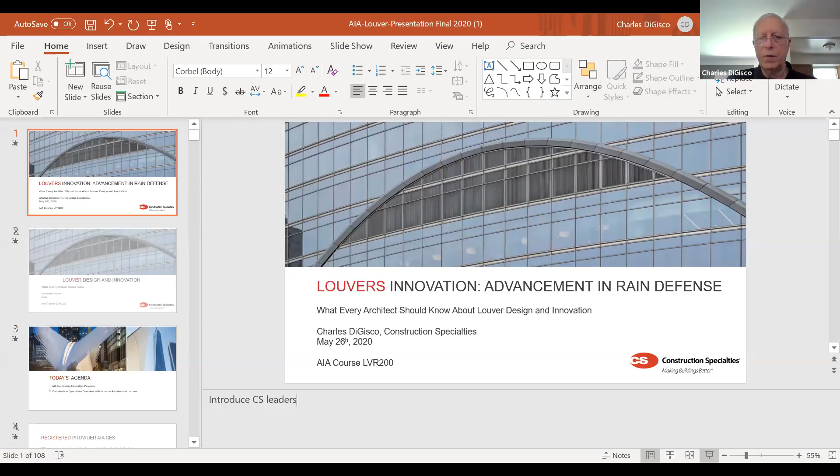Good afternoon, everyone. Everybody safe and sound? You have to pull your screen down, right, Lauren? Or Aaron? You should be able to share immediately from your screen, but let me know if you run into an issue. No issue. Great. So let's reduce that. Okay, everybody can see the screen, I hope.

So good afternoon. My name's Charles. I've been with Construction Specialties exactly 20 months. Today, you are going to be presented an AIA continuing education course, and the title is LVR 200, Louver Innovations, Advancement in Rain Defense.

This is an AIA continuing education program, Construction Specialties overview with focus on architectural louvers. And you can see a couple of images on this screen here. This is the Oculus at the Transit Hub in New York City on the grounds of the old World Trade Centers. And this is the Freedom Tower on the right that you see in the image.

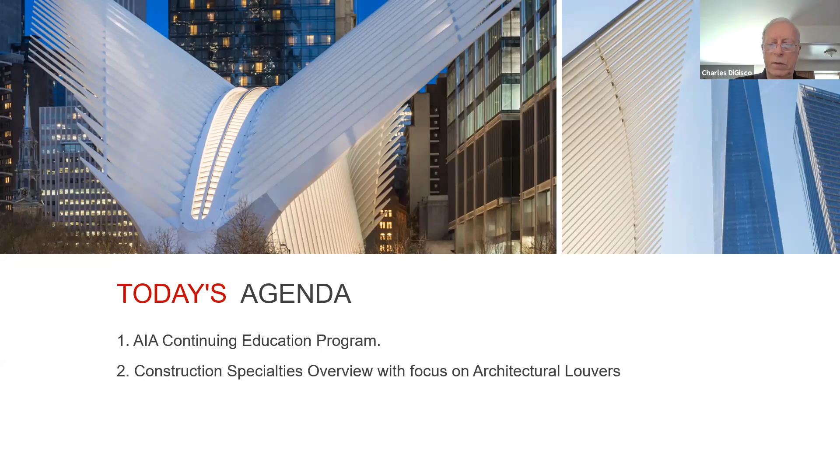Construction Specialties is a registered provider with the American Institute of Architects continuing education system. You will earn credit on completion of this program. Our provider number is J144-03. This program is registered with AIA CES for continuing professional education.

As such, it does not include any content that may be deemed or construed to be an approval or endorsement by AIA of any material of construction or other method or manner of handling, using, distributing, dealing in any material or product. Questions related to specific materials, methods, services will be addressed at the conclusion of this presentation.

So, what will we learn today? We're going to have a good understanding of architectural louver types, their availability, where to use them, and the conditions where louvers are specified.

You will hear AMCA. That acronym stands for Air Movement Control Association. And BSRIA, B-S-R-I-A, is an acronym for Building Services Research and Information Association. Mostly today, we're going to be dealing with AMCA certifications.

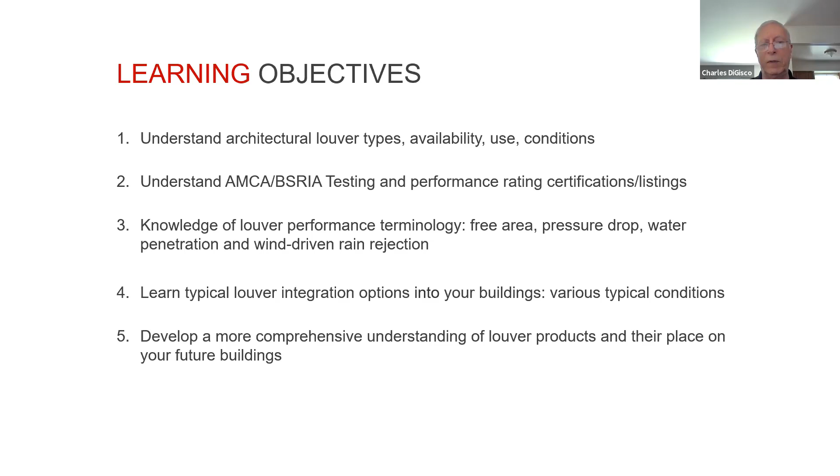We'll learn typical louver integration options into your building, various typical conditions, and along the way here today, we're going to develop a more comprehensive understanding of louver products and their place on buildings. So, let's get started.

Louver aesthetics is a very major part of the design of a building envelope. This is driven 100% by architects. The architects decide what it's going to look like, where it's going to go, and how it's going to be installed, and what color it's going to be.

If you are outsourcing your MEP, FP to a mechanical consulting engineer, you will then be tasked with air intake criteria. Air intake criteria is the principal function of a louver system, right? So air from the outside passes through the louver system, stops the water, and then just the air passes through the other side. So aesthetic, 100% architect driven.

Air performance, this is in collaboration with the mechanical engineer. And water performance, keeping out wind-driven rain. We're going to talk about that very shortly, why that is so important to the mechanical engineer.

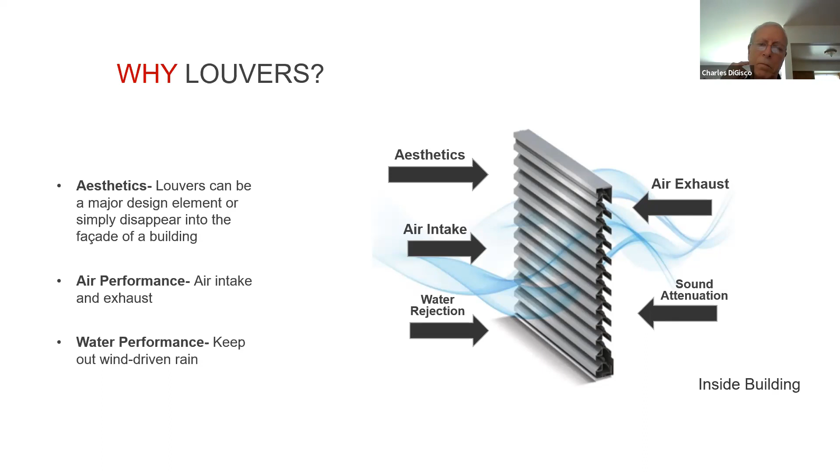So a little bit of history. In this image on the right, you see that the blades are quite wide. The face of the blade has got depth to it. The spacing, or the free area, between the bottom of one blade and the top of the blade beneath it allows a lot of air to pass through. This is free area. So this is an older design, the J style, the Z style.

These are very, very good for airflow, very good free area, but they offer little to no rain defense. So any rainwater that hits the face of that blade, the widest part that we're looking at, for the most part gravity will pull it down and away from entering the building. But only the rain that hits the face of the blade will drain off it.

Back in the late 80s, you started to see different extrusions that now had a drain in the front. So the conventional thinking is, well, if I have rain hitting the face of a louver blade, and it gets collected and drained off by the design, then I have excellent water mitigation, and I've pretty much stopped the entrainment of water in the building. Not necessarily 100% accurate, because the only water that will drain off the face of the louver is all that the drain will catch.

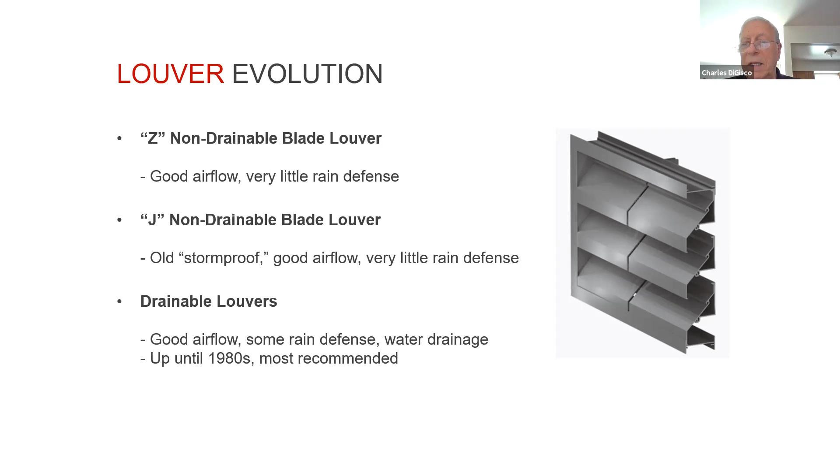So I'm going to go back for a second. This is the older style louver design, wide facing blade, a lot of space between the bottom of the top blade and the top of the blade beneath it. And then we have this. So you can see by the very nature of this horizontal orientation of these louvers, we have reduced the amount of space that water can pass through.

So I'm going to stop here. We're going to talk about why managing water with a louver system is so important.

Back in the day, they used to design a plenum. So quite frankly, it didn't really matter how much water entered the interior of the building, it fell to the plenum, to the space, and drained off. But as buildings became much more efficient and air handlers much more efficient, the space that a plenum took up was now used for mechanical systems. So now we needed to stop the water from entering the mechanical system.

The first space in a mechanical system that water comes in contact with is the filter cartridge, or the filter cassette, or just the filter. So this is the first point where water being introduced to a filter can create pressure drop, because as the filter gets wet, any airborne dust now turns to mud on that filter and makes the air handler work harder to pull the same amount of air through it. This is why mechanical engineers do not want water entering their mechanical system.

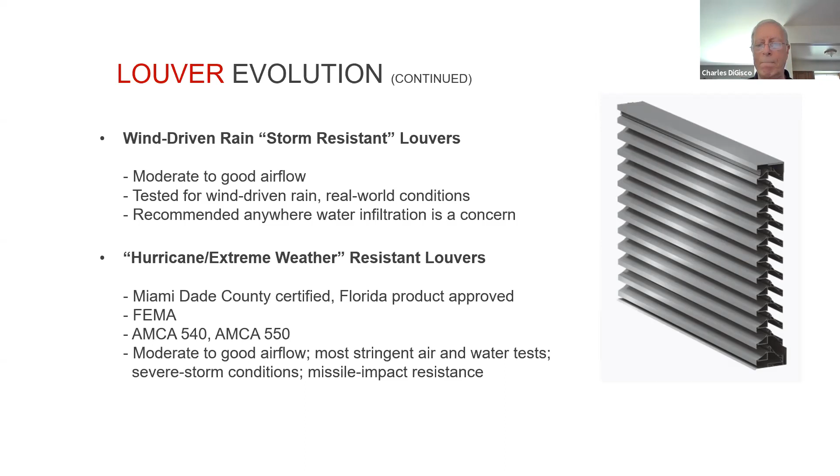Okay, so we have some choices, right? When designing a louver, we have to consider rain defense. We just saw a louver system with the blades very close together and that little bit of a hook. You're going to see an image shortly, which we'll talk about. Free area, which is the amount of air that the air handler is requiring, is space between the blades through which air can pass. Pressure drop: in the very design of a louver system, by the nature of the blades being so close together, you will have less free area. And if you have less free area, you will have a drop in pressure. We're going to talk about this a little bit more in a moment or two.

And then there's the design of the louver itself. Okay, so if I increase the size of a blade, let's say from 5 inches to 7 inch, the depth of that louver increases the same. So if I have a 5-inch blade, I have a 5-inch deep frame. If I have a 7-inch blade, I have a 7-inch deep frame. And a 9-inch blade, obviously, a 9-inch depth frame.

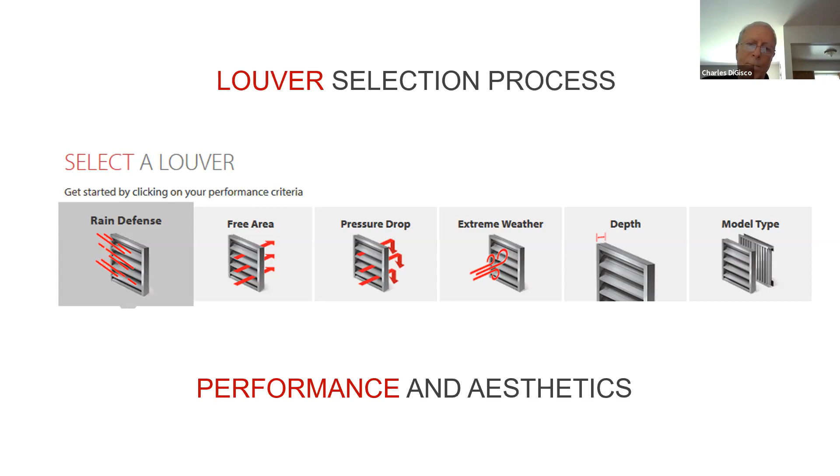And then off to the right, you see a couple of model types. Now, we're bordering on a discussion of aesthetics here, 100% architect driven, and we're going to talk about this in another couple of slides as well. So you have two choices: the first choice is you can have a horizontal orientation, or directly behind that, you can see a vertical orientation. So those are a couple of choices that you can make. I don't want to give away too many bits of information just yet.

So we talked about AMCA. AMCA is an acronym for Air Movement Control Association. They are a third-party independent testing and certification laboratory, I believe in Arlington Heights, Illinois. AMCA is testing and then certifying, but not all louvers by all manufacturers are tested and certified. Some are just tested. So in your specifications, if you call out for an AMCA 540 or an AMCA 550, you are going to get a louver system that has an AMCA label on it saying that it is certified to those specifications, right? AMCA tests air performance, and they test water performance, specifically wind-driven rain.

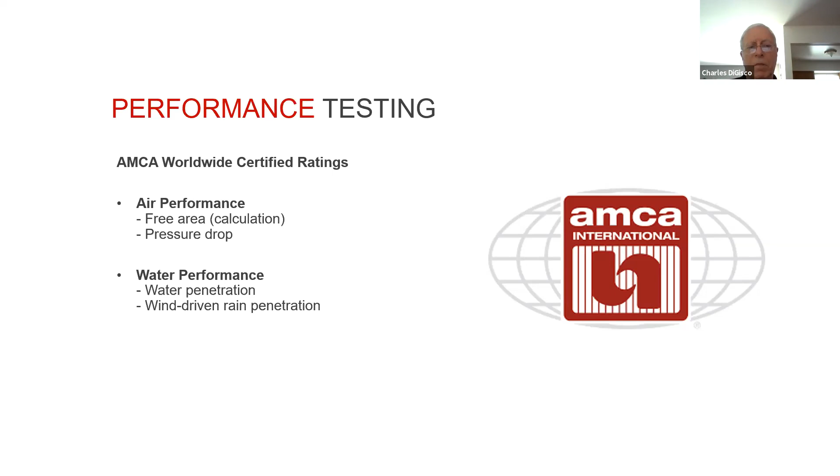So those are the labels. You will see very often water, air, and wind. The label itself is actually blue and yellow, and most always in the specification, when it's designed, when you write the specification, you will say AMCA 540 or AMCA 550, and that label will be on the frame of the louver system that's delivered to the job site.

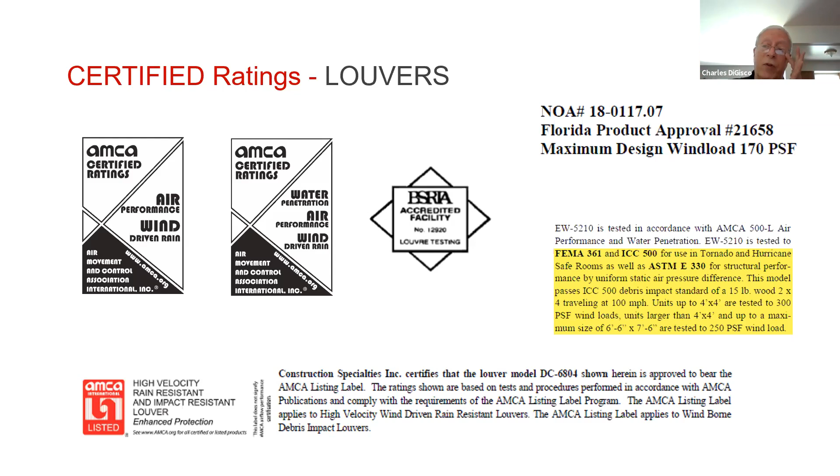So a few minutes ago, we talked about Miami-Dade, and I spoke briefly about NOA, Notice of Acceptance. So these numbers here are tied specifically to Notice of Acceptance and Technical Application Standards. Okay, so product 21658 and Notice of Acceptance means that they accepted it's been tested. These are part and parcel to the specification when you move into Dade County, Miami-Dade County louver systems by any manufacturer.

So let's talk about air performance. You're probably saying to yourself, how many times is he going to tell me about free area? Well, it's important. The free area is the opportunity for outside air to pass through a louver system to be picked up by the cubic feet per minute draw created by an air handling unit.

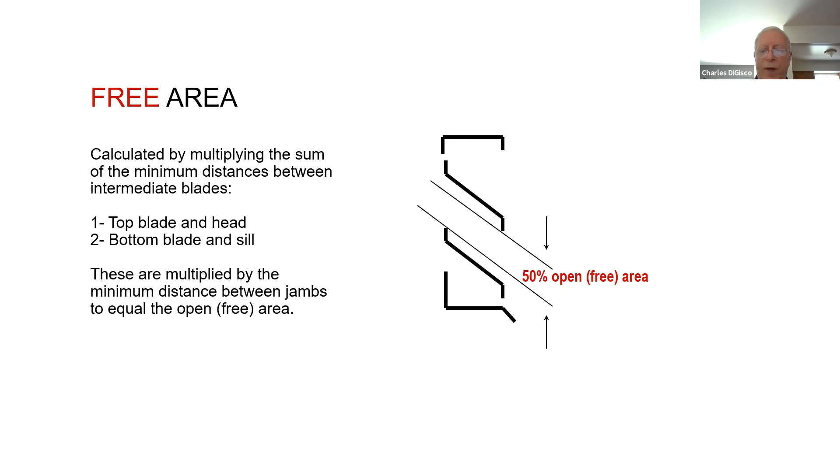Okay, so free area is important. Managing rainwater entrainment is also important. You'll see in a second.

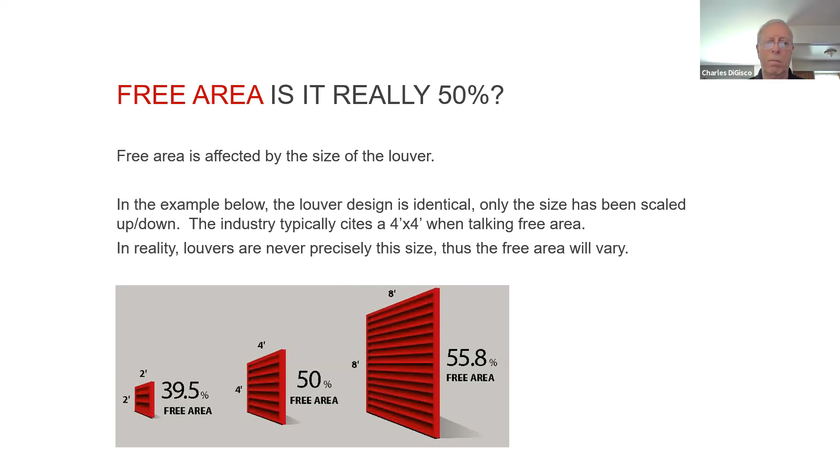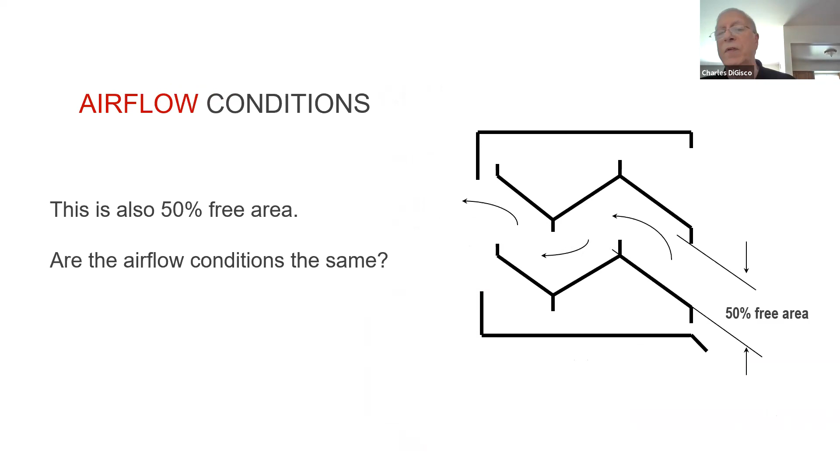So now, this is not a trick question, right? You can see what's happening here. So I have the bottom of the top blade and the top of the blade beneath it as my free area. The air starts out very nicely entering the louver system, but guess what I did here? I created my own resistance. I disrupted the airflow. I created pressure drop.

So I start at 50%, but now I have a louver configured in such a way to mitigate water entrainment that I've now created pressure drop and I have less free area. The correlation between free area and pressure drop are connected forever. The less free area, the higher the pressure drop.

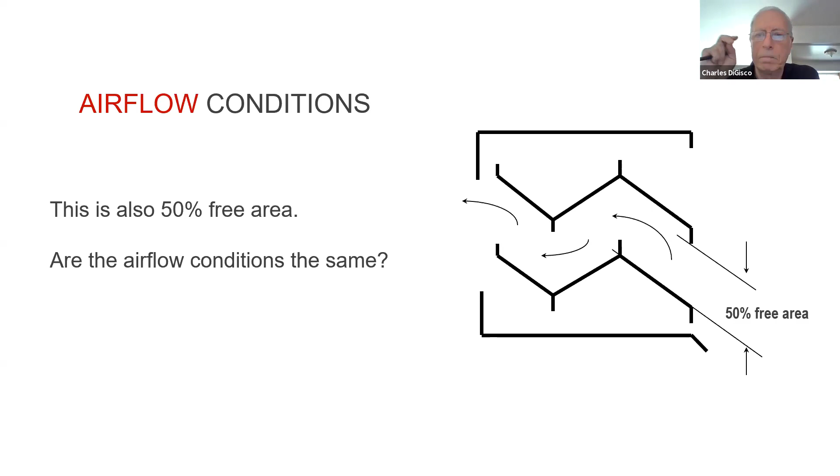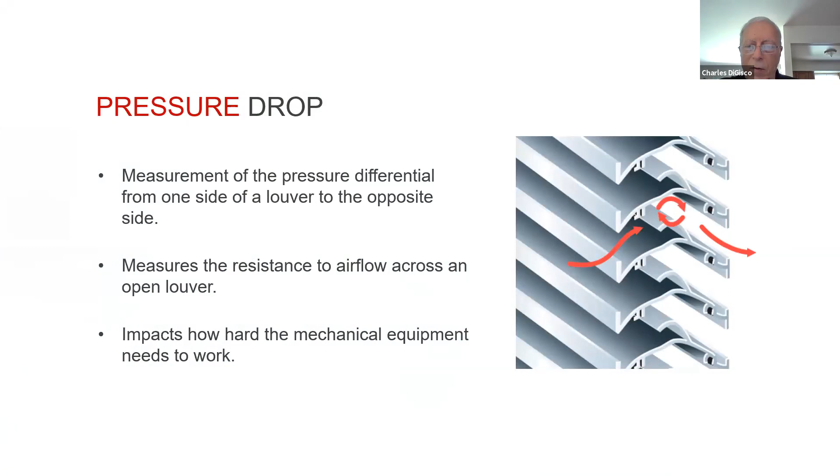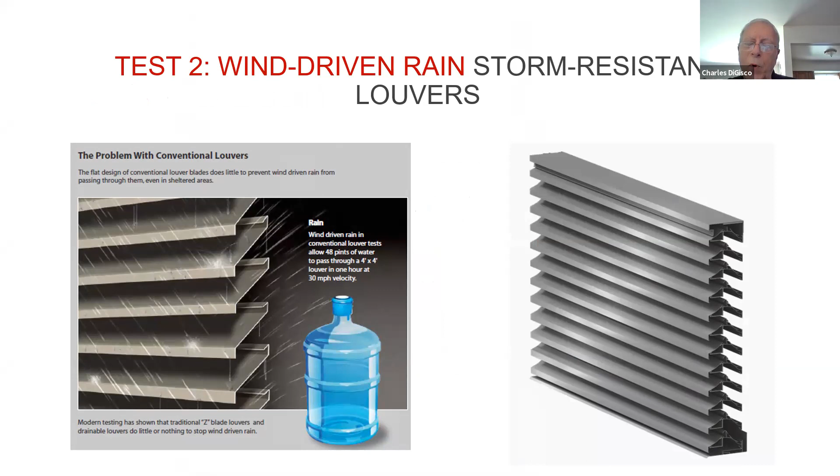Off to the right, you have a storm-resistant louver. Do you want me to go back? I want to show you that picture again. This louver system right here is that one. In a traditional storm-resistant design, your louver blades will be closer together, with that extrusion or hook as part of the extrusion. These louver systems give you the greatest opportunity to stop water entrainment into a building.

So the first test we saw was still air—it was an AMCA 500 test, but there was no wind driving any water against the louver. It was just water falling, nice spring flat rain, and then the axial fan off to the left was creating the draft normal in an air handler.

In this test, we have a 2-speed fan, 29 miles per hour or 50 miles an hour, and at the same time we're driving rain pushed by the wind—either 3 inches per hour at 29 miles per hour or 8 inches per hour at 50 miles per hour. This test is specifically designed to challenge the louver system's ability to manage water entrainment. It is called the 500L99. In your part of the world, you will specify wind-driven rain louvers almost exclusively. Very rarely would you not do that.

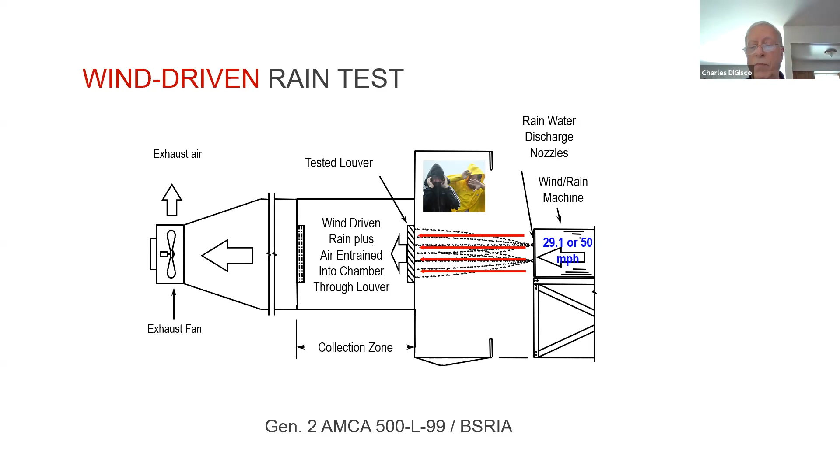So this is what the test chamber looks like. In this larger box, an arrow points to an orange square, and that orange square is the louver. You see this cylinder—you're taking wind and driving rain, simulating 3 inches an hour at 29 mile an hour wind, or 8 inches an hour at 50 mile an hour wind, and driving that water right to the face of the louver. The test is designed to see if the louver will fail and water will enter the interior of the building. This is a very good test.

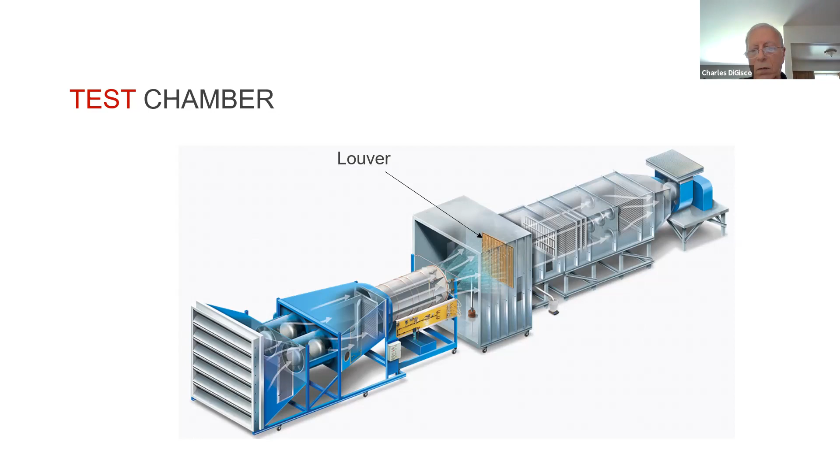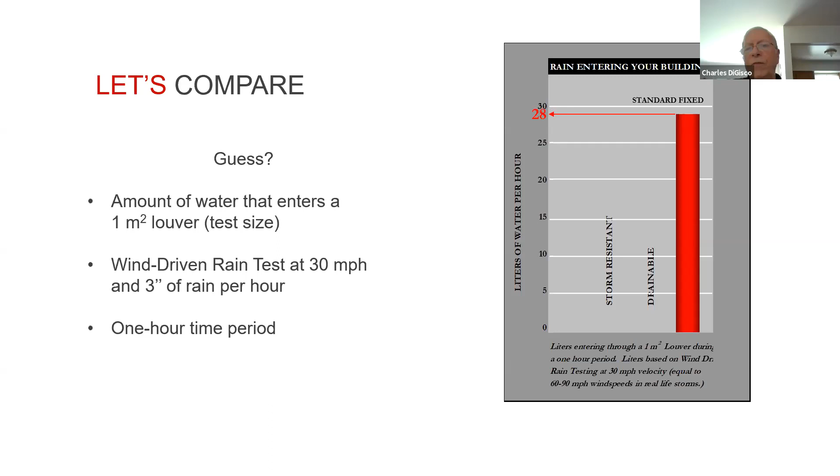So let's play a little bit. We talked about J and Z type blades, then a drainable blade, and then the best of the best, storm resistant blade. The standard blade offers virtually no management of water entrainment whatsoever—28 liters of water per hour is entering the interior side of the building. This is a problem for the air handler, I can tell you.

So you say to me, Charlie, can I design a drainable louver that helps with water entrainment? Well, yeah, you can—watch what happens. Now only 26 liters of water per hour are entering the interior side of the building. This is still a mess. Then you say, okay, I want storm resistance, and you're going to get it. That is the difference between standard flat-faced louver, standard louver, drainable, and storm resistance: 2.5 liters of water per hour. That's it.

This is a very important, but very simple, very important graph.

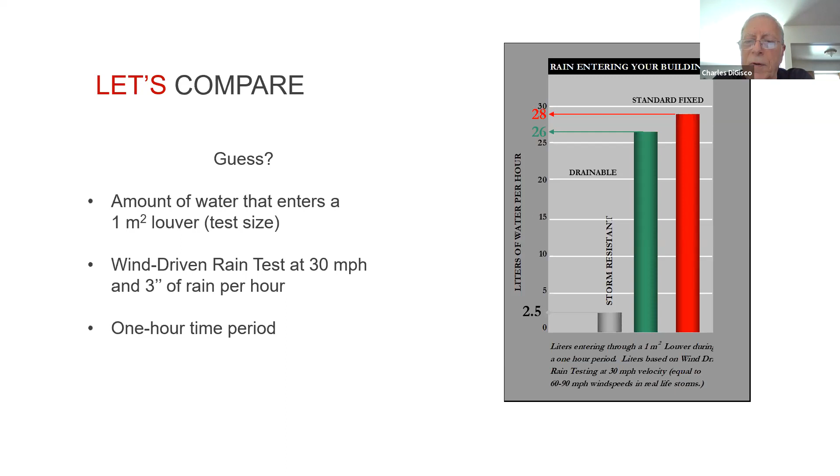Now, I'm sure you'd have lots of questions, but this is the back of a louver, the interior side. If you look all the way down the bottom, you see a straight but somewhat wide piece of aluminum—that is a sill pan. Any rainwater that enters the building without the force of fans, in a typical louver, drains off the back of the blade and gets collected by the sill pan, then comes out the front or the side. You also see these two little angles of aluminum—those are the clip angles. That's what secures the louver frame to the CMU or whatever material we're installing the louver to, most likely CMU. Here we go.

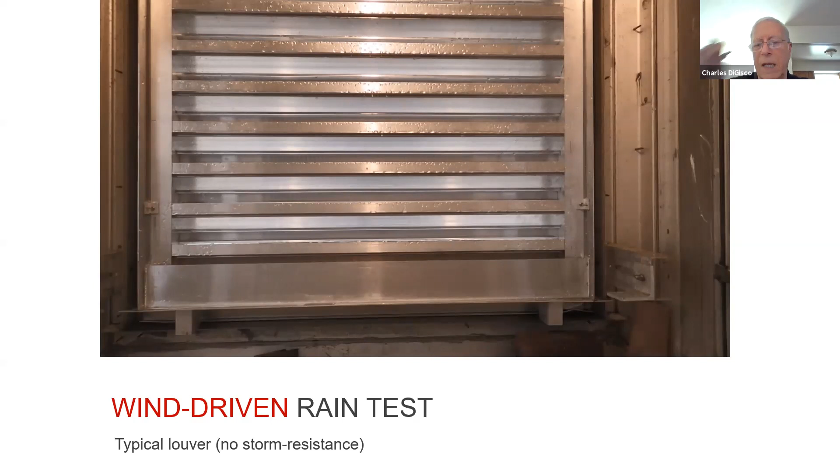This is a simulation, a test. This is not a storm-resistant louver, but it's being tested as if it were supposed to resist storm, wind-driven rain. You can clearly see we have a disaster on our hands by how much water is on the back of the blade. We don't want that. Air handlers hate it. So let's move on.

Here, same size. You can see the sill pan at the bottom, that solid long piece of aluminum. You can clearly see the clip angles, simulating clipping off to CMU, attached to the frame. This is a storm-resistant louver. The louver previously was not.

Hardly anything. This is what we want. So, standard, Z or J, no water management, no mitigation, no entrainment at all. Drainable, a little bit, not enough. Storm resistant, you win.

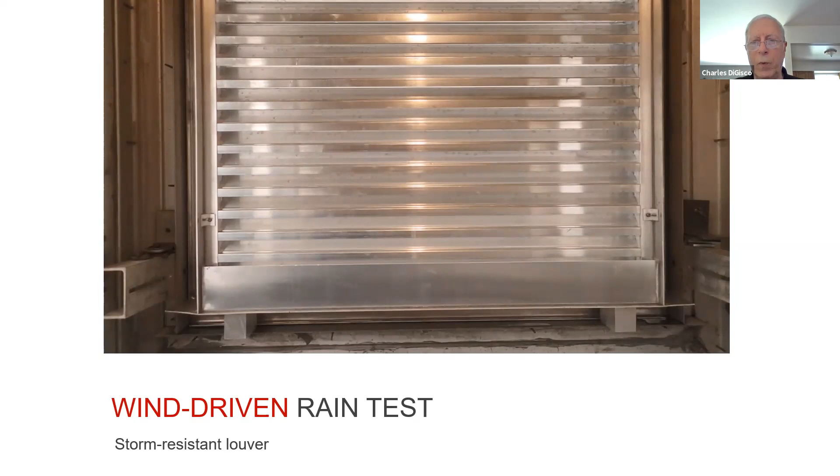There are two orientations. We saw a little image earlier in the presentation. Up top on the left, we have a horizontal orientation, clearly storm-resistant blades, rain driving against the face of the blade, and none reaching the interior side of the building. Down at the bottom, vertical orientation, lots of blade face for rainwater to come in contact with. Gravity works in your favor and the water doesn't get to the inside of the building. These are both storm resistant, one horizontal orientation, one vertical.

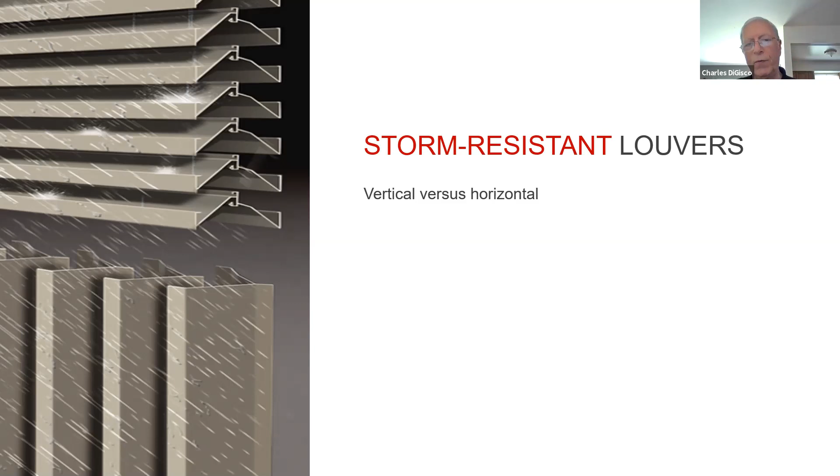This is where we have the most hurricane-prone, high wind situations. We have options. We have AMCA 540, impact, and AMCA 550, 110 mile an hour wind, 170 pounds per square foot wind loads. We have choices.

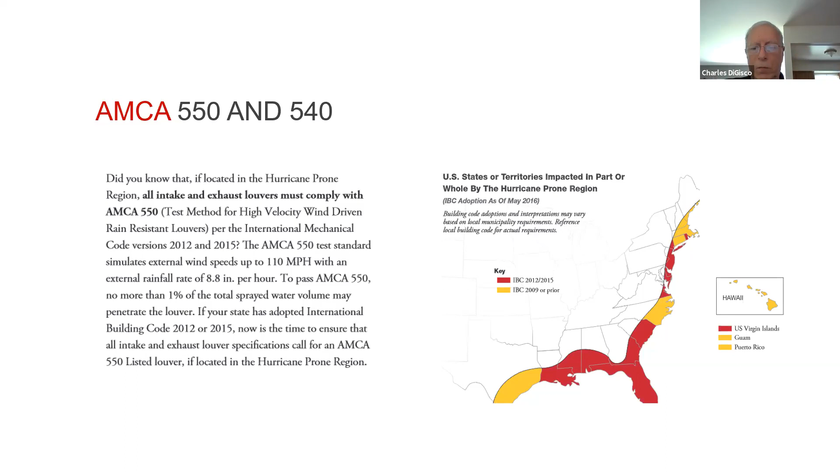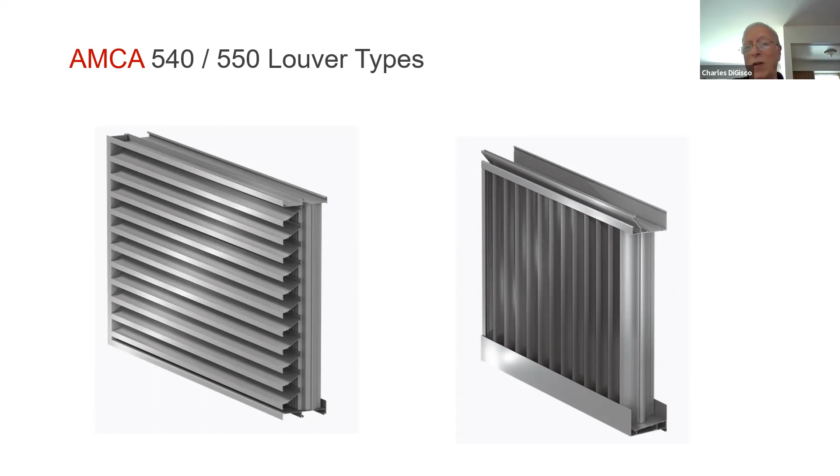So what is FEMA 361? FEMA 361 is the guidelines from the federal government for tornado and hurricane, for any community residential safe rooms. More and more you see safe rooms designed, unfortunately, in schools. So sad to say, but the school still needs to get air. Or the Public Safety Administration building, the firehouse, the police station. All of these locations very often will have FEMA 361 written into the specification.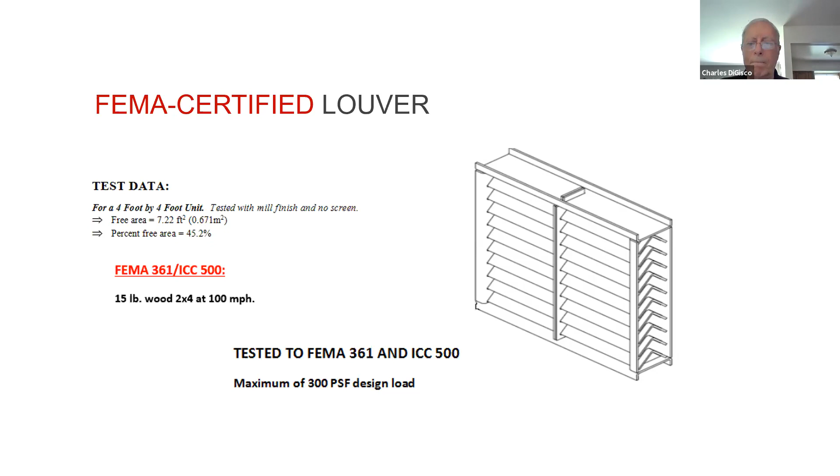This is an acoustic louver system. So the idea here is we are not concerned about rain defense. We are not concerned about airflow. We are concerned about noise decay and how to facilitate it. So the way you facilitate noise decay is you give the noise the opportunity to reach something that will absorb it. This is very evident if you were to go into a brand new room that you just built for yourself.

There is nothing on the wall. There is nothing, no furniture. There is no carpeting, nothing. You can hear your echo because your echo is not decaying in the room. But as soon as you introduce sound attenuating materials into that room, you've reduced the decibel. That is the principle of acoustics.

So if you design acoustic louvers, most often they will be in generator set rooms. If the generator room is attached to a hospital building, it's an L3 type generator room, which means you have to reduce the noise decibels by 13, minimum.

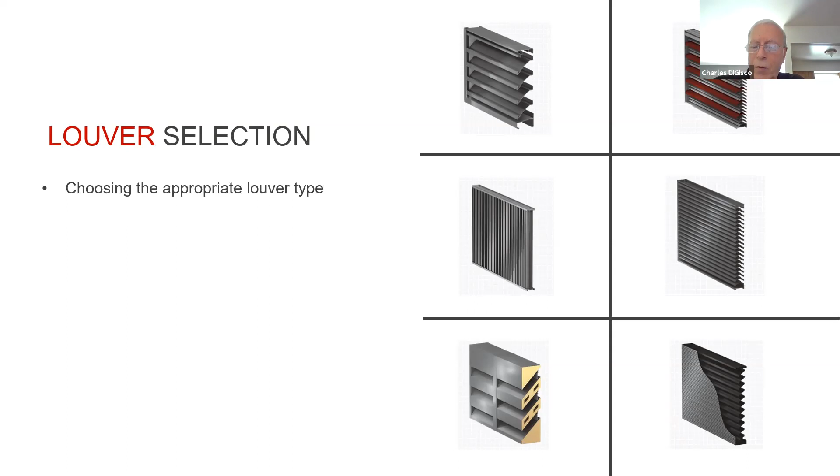Off to the right, you see a very slick looking louver system that has storm resistant blades, but this time the architect decided, I want color. So that design introduces color, spaced out and 100% architect driven. Directly below it, we've seen this before - this is a storm resistant louver. And then below that, you see a louver system, storm resistant, but in this particular illustration, you see a decorative perforated material in front of it. That system is also tested and certified. So you have some things to think about here: acoustics, you can add color, you can add something in front of a louver because maybe you don't like the look of the louver. Total 100% architect driven.

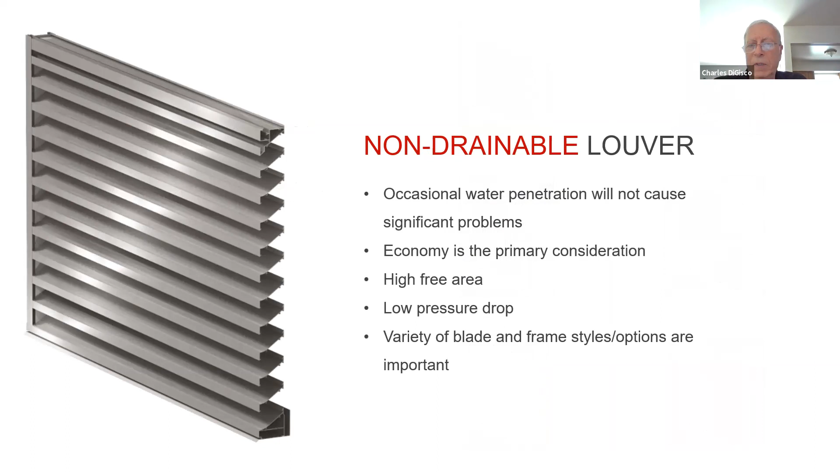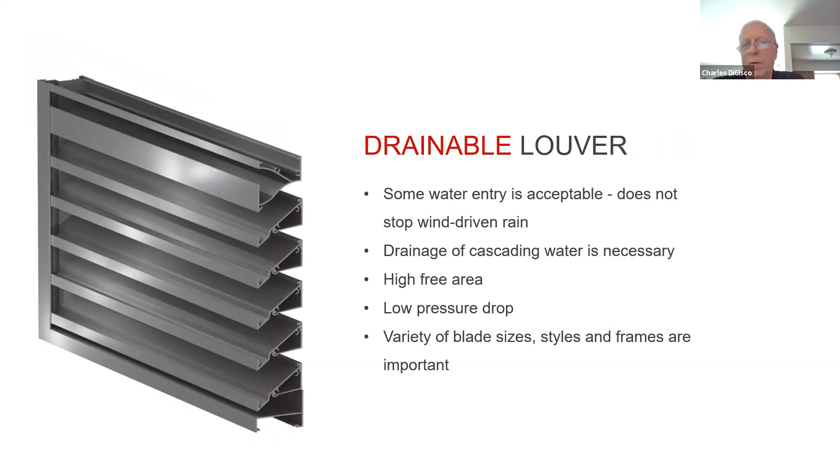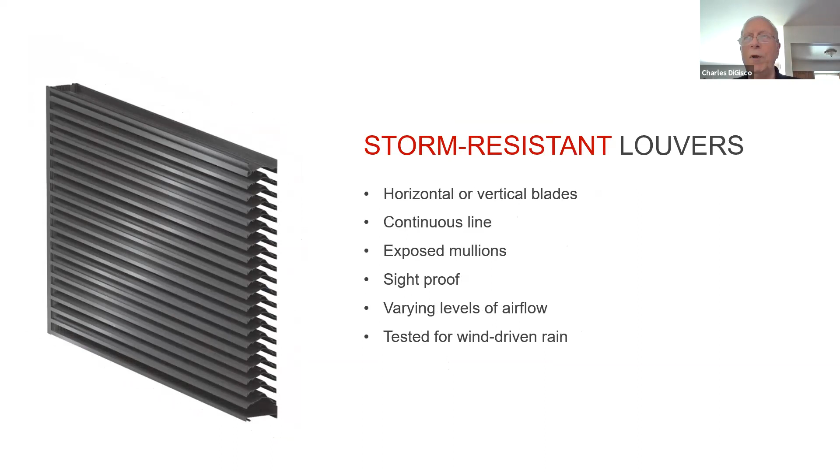So we talked about this. This is the non-drainable design. We know that we have 28 liters per hour entering the building with this type of louver system. Drainable - we know with this system we make only marginal improvement, but we still have 26 liters per hour of water entering the building. And then storm-resistant louvers - here we have managed to provide no opportunity for water to enter the building. 2.5 liters per hour, if I remember the number correctly.

Okay, so there are a few types of louvers. This happens to be a louver system that would be specified perhaps in a hospitality application where PTAC, package terminal air conditioners, are installed, where water protection is not an issue, but high airflow is.

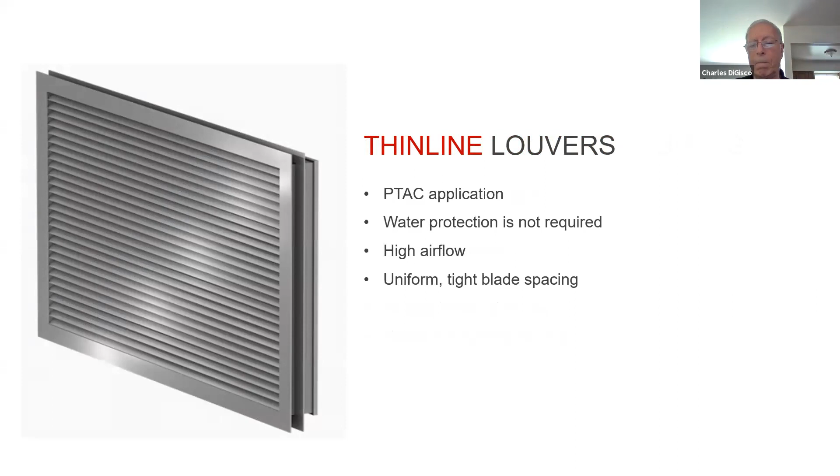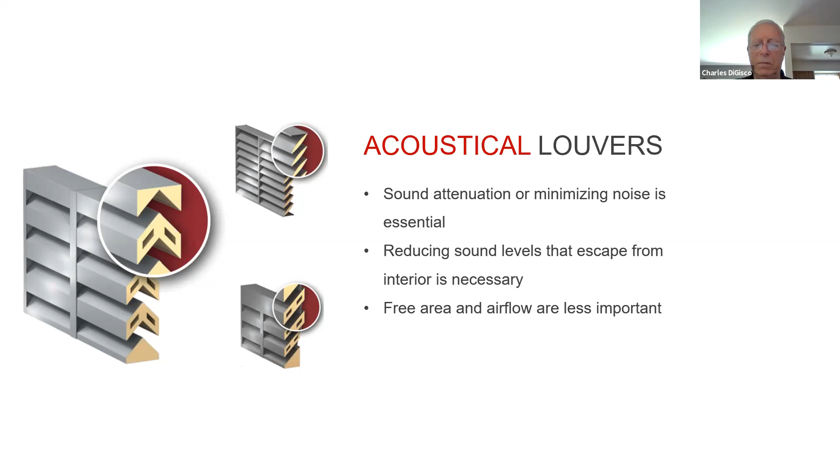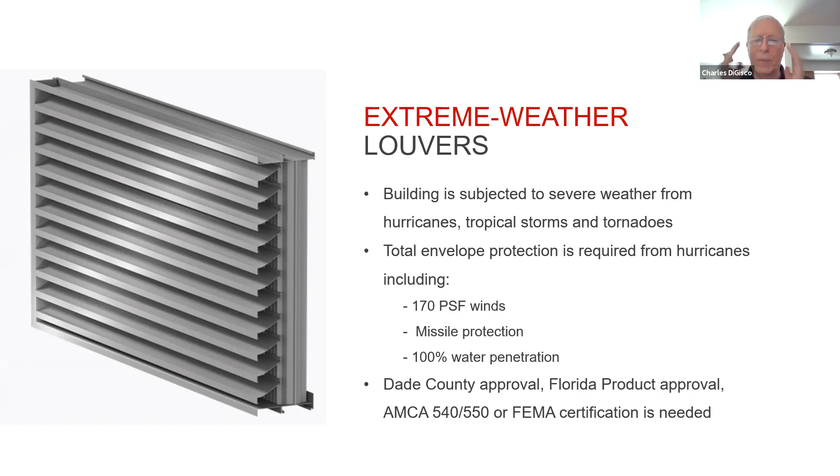Yes, there is such a thing as blast-resistant louvers. These louvers are designed to take a charge of 12 psi or higher at a pulse rate of 7.83 milliseconds - a bomb. Federal buildings, GSA products, all VA hospitals, standard blast-resistant louvers. They look quite nice in person because the blade is rather robust, and it's a very nice looking louver, but it is extremely strong - 12 psi is pretty high. And any federal building, if there is a Federal Reserve building, if there is a VA hospital, blast-resistant louvers are included, always.

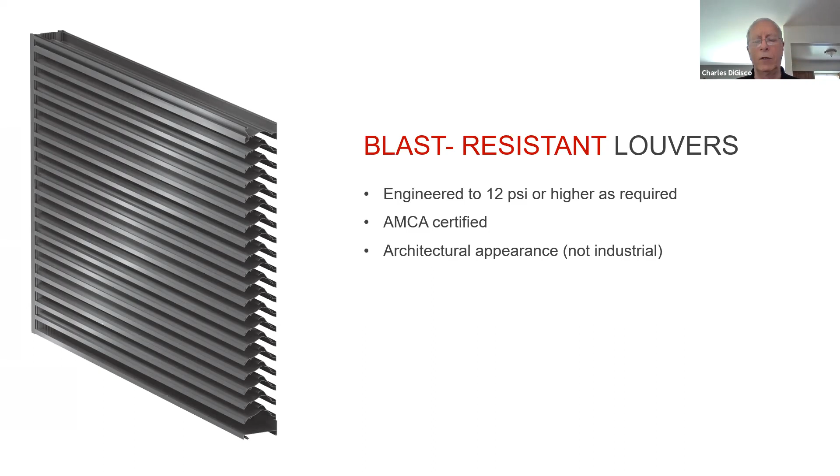Okay, 100% architect driven - you decide how you would like the louver system to look on your building, keeping in mind that you're not particularly crazy about louvers to begin with. But off to the right, in this beige building, this green louver system, the architect liked the look of exposed mullions, tall, thin sections. But directly beneath it, you see a clear span louver application, and here there's a very good chance that that louver system is closer to grade and may actually be, even though it's the same color, a different louver entirely.

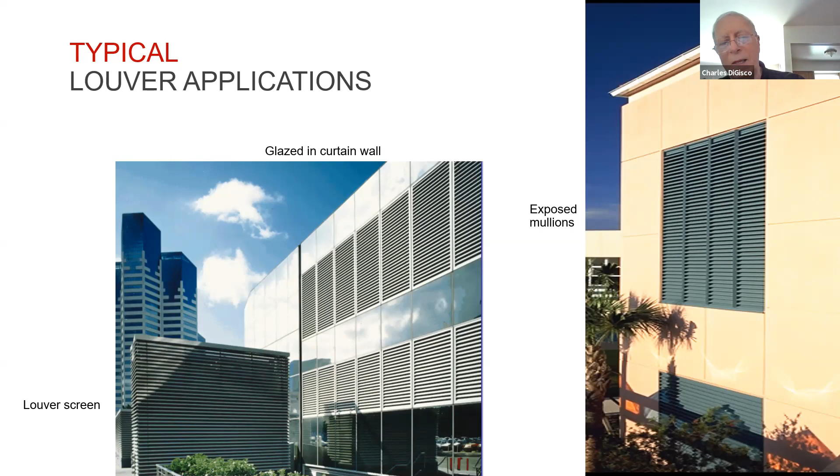And then in the center, if the design allows you to, you could draw louvers right into a curtain wall system - clean, flush. Off to the left, you see a louver system for the exclusive purpose of hiding what's behind it. 100% architect driven - I shouldn't say 100%. There are some ordinances, especially for rooftop mechanical equipment, air-cooled chillers or cooling towers, where there may be an ordinance that says you have to cover it.

Okay, this is what a standard frame looks like. You can see your clip angles clearly in the section cut off to the left. This happens to be a 4-inch Z-blade, not storm resistant.

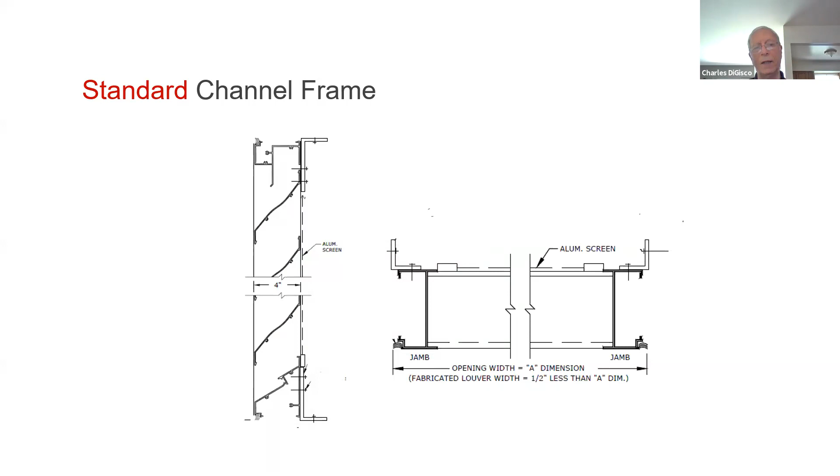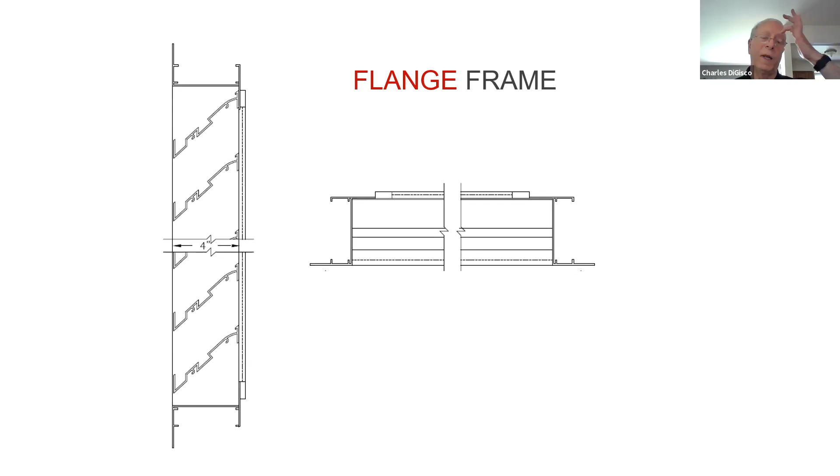Here is a flange frame design. So you're saying, okay, this is an exterior flange, so I get it - I can take this louver from the outside and push it into the opening and it won't fall through the punched opening. There is also an interior flange, which means that the two flange legs that you see on the left side of this image are now on the inside. So that design would be for an installation from the interior side of the building, so the louver doesn't fall through the rough opening.

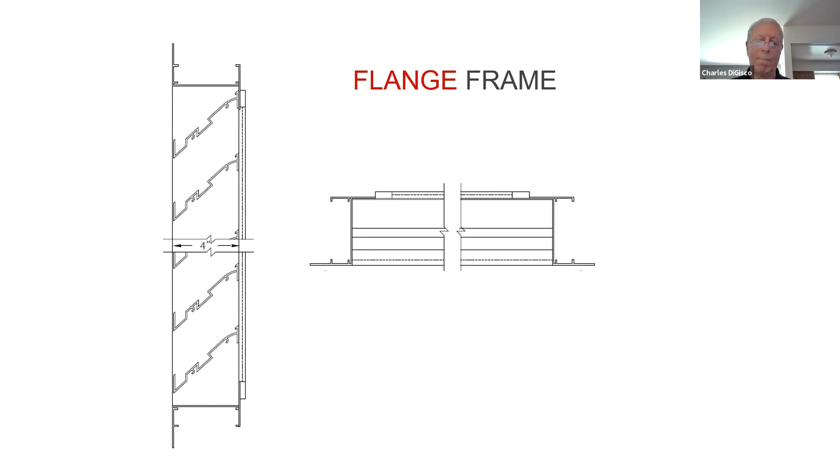Then there is the glazing option. Off to the left in this illustration, take notice of these hash marks in the louver. Those are actually drains in the left and right jamb of a louver so water can drain out. Down at the bottom, that little square you see is your glazing pocket, your glazing adapter.

In the center, you see a louver, a storm-resistant louver, clearly. And on the right, you see the classic J-style drainable.

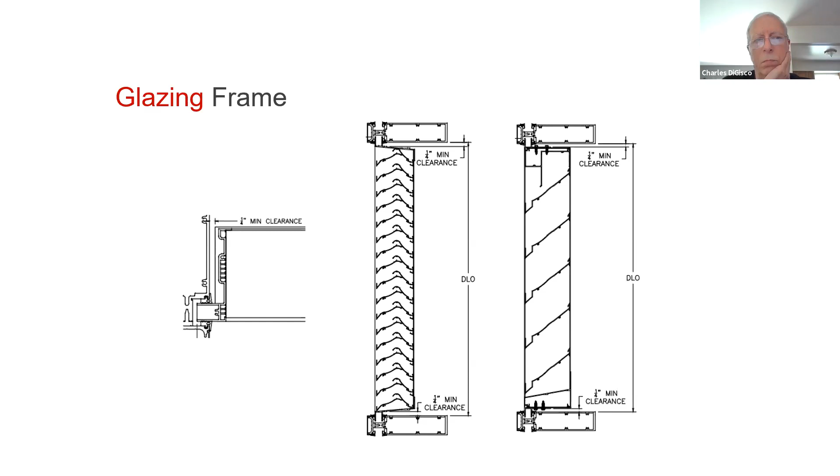100% architect-driven. This is a glazed-in louver system, except the architect wanted to create this specific look as if they were all individual. So all that is beauty cap. Other than aesthetic, no purpose whatsoever.

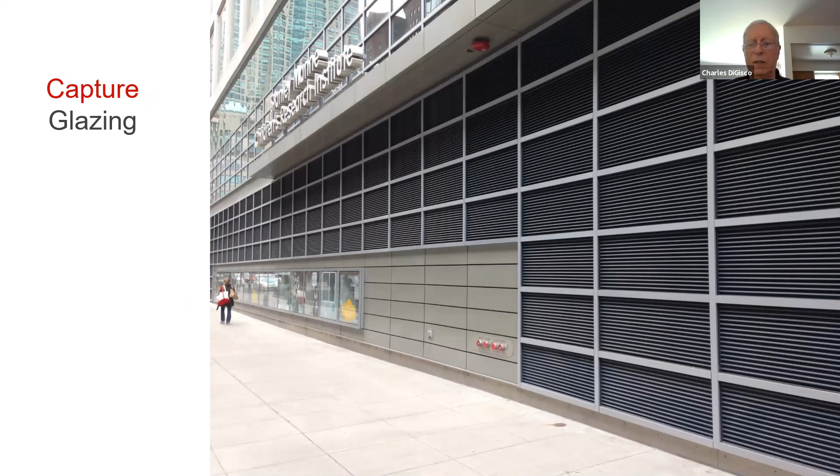I always like this slide. Okay, structural silicone glazing, SSG. Very slick, flush, clean. Clearly you can see the louver installation follows the contour of the glass. Seamed perfectly. In any glazed application, very often, louvers are sent to wherever unitizing is going to be done.

Another example, perfect architect-driven aesthetic. This is not an accident. The architect looked very carefully about how everything lined up perfectly. Those are louvers that you see on the side of this building.

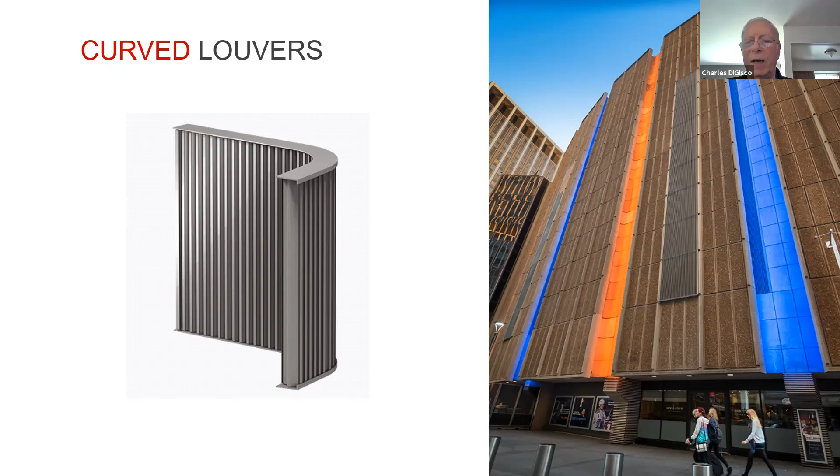That happens to be Madison Square Garden on the right-hand side, New York City. Color, louver type, shape, custom. The architect drew it for the manufacturer and asked, can you build this? The manufacturer said, yes, I can.

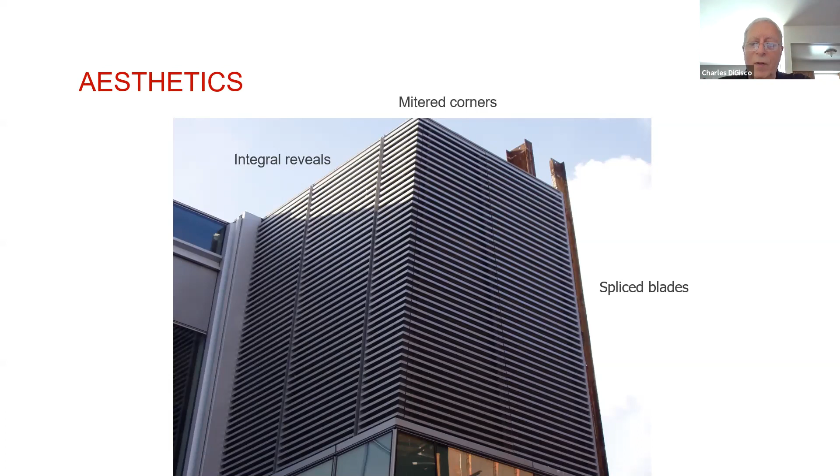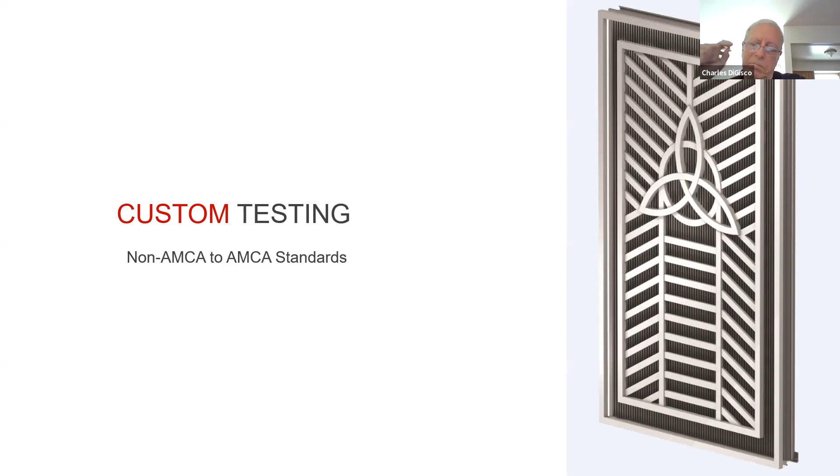So you're probably saying to yourself, Charlie, if I put something in front of the louver, aren't I creating pressure drop? Great question, you're right, you do create pressure drop. But in this case, the manufacturer designed the space behind the louver, between the front of the louver and the back of the perforated sheet, essentially creating free area. So compensation was made by creating space for air to accumulate.

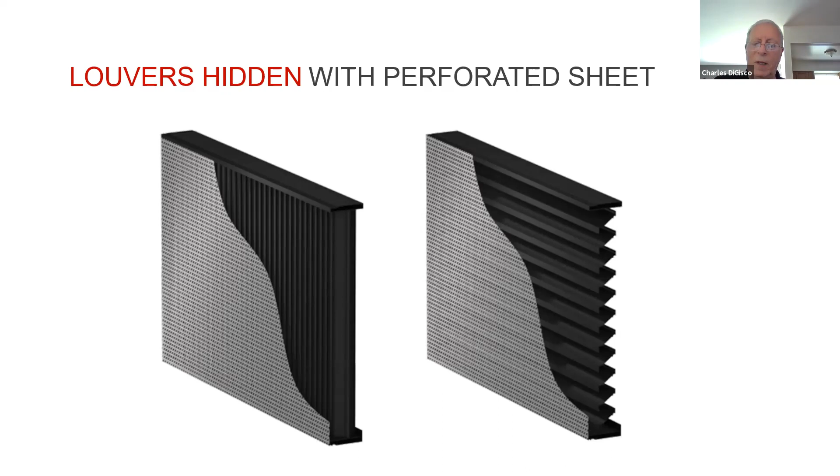Okay, we've seen this, right? Charlie, I don't like the way louvers look. I need to add color.

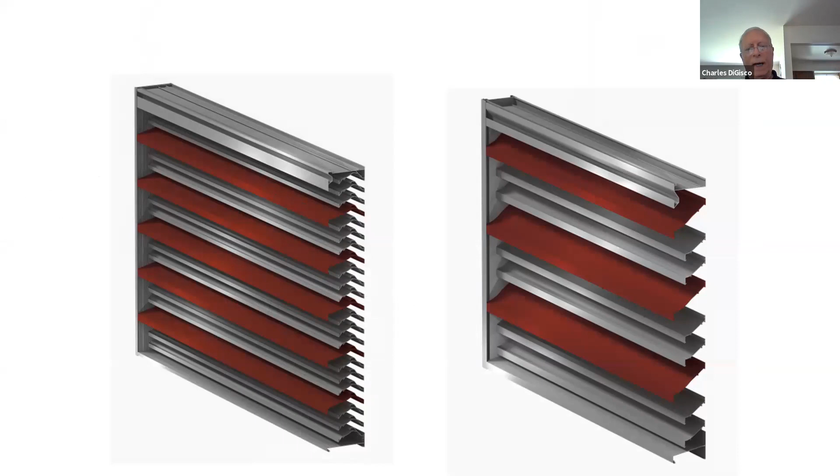That's what you get. Off to the left, storm-resistant design. Off to the right, a traditional J blade back in the day. But there are some very interesting applications for this aesthetic.

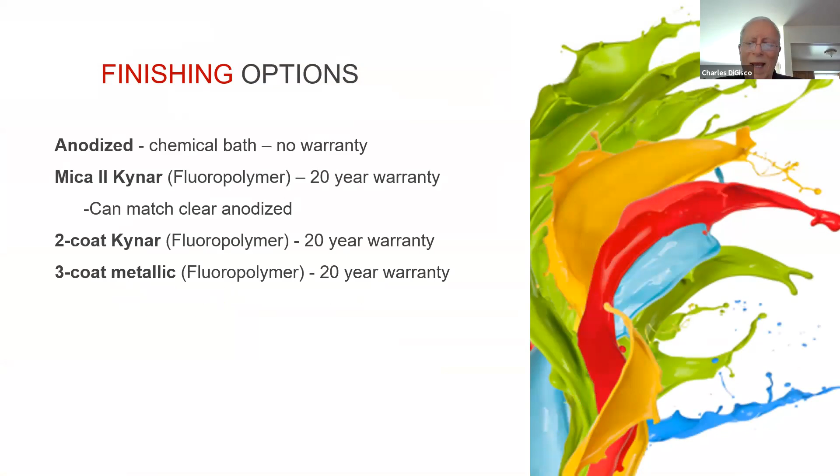We have choices here. I should say you have choices. Any RAL or PMS color, or any custom color that you can conjure up. Anything. You have no limit.

So right off the bat, you see anodized has no warranty. Well, Charlie, I want a warranty. Simple. Paint the louvers clear anodized, and you get a 20-year warranty. 2-coat, 3-coat metallic, of course, powder coat, also 20-year warranty. Powder coats, custom colors, green, of course, with no volatile organic compounds or hazardous waste.

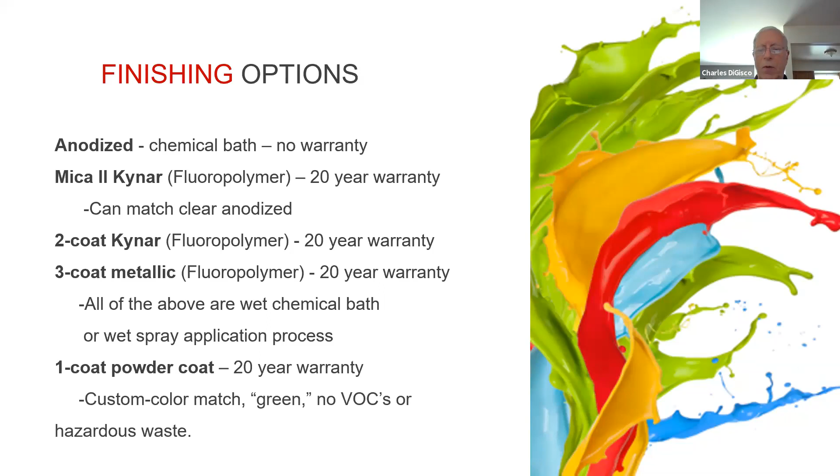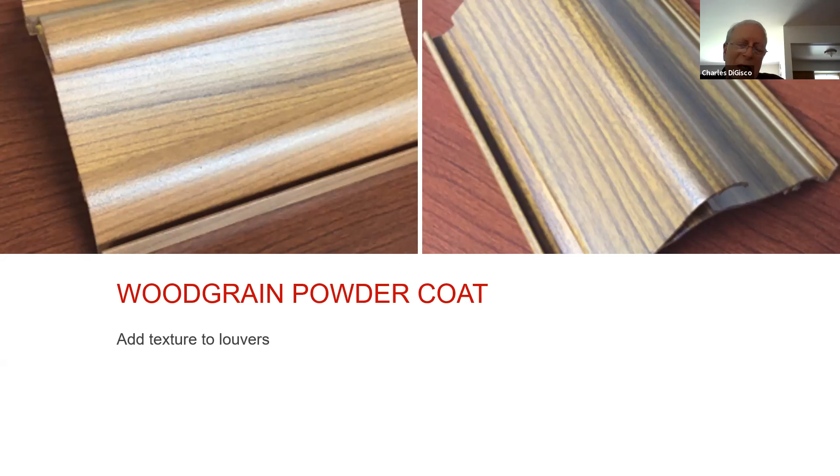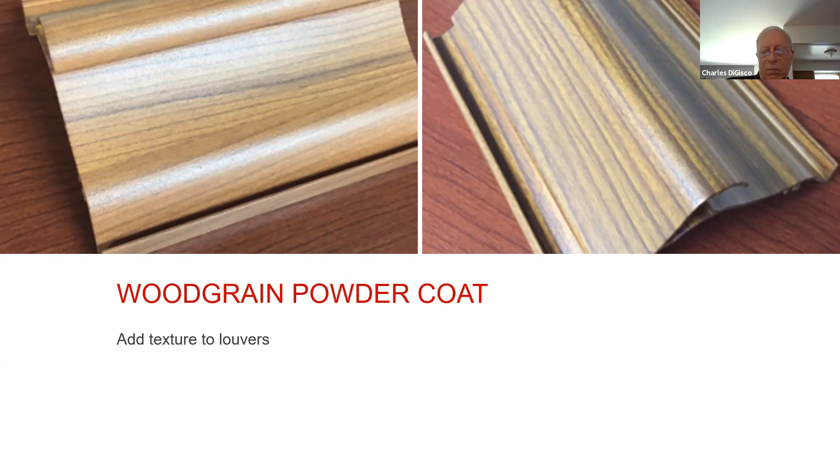10-year warranty. It looks just like wood. And that concludes my portion of the AIA course. I hope you enjoyed it, and I hope you have some questions for me.